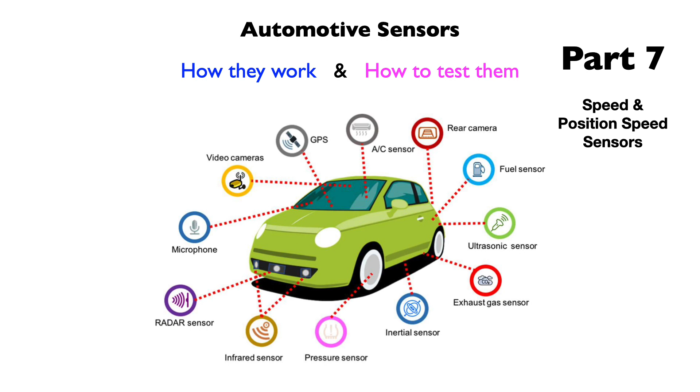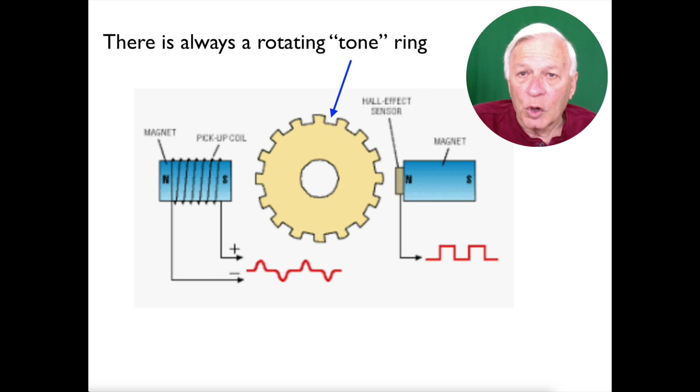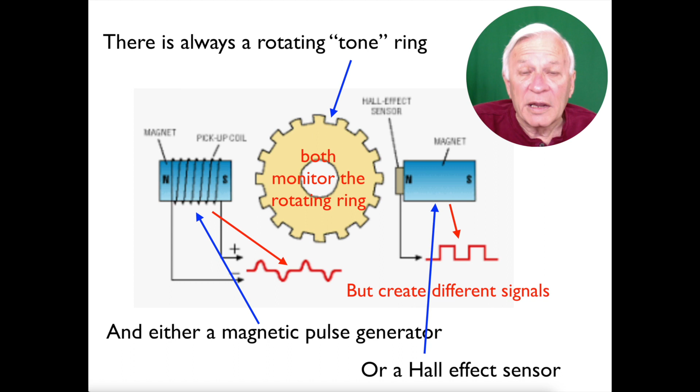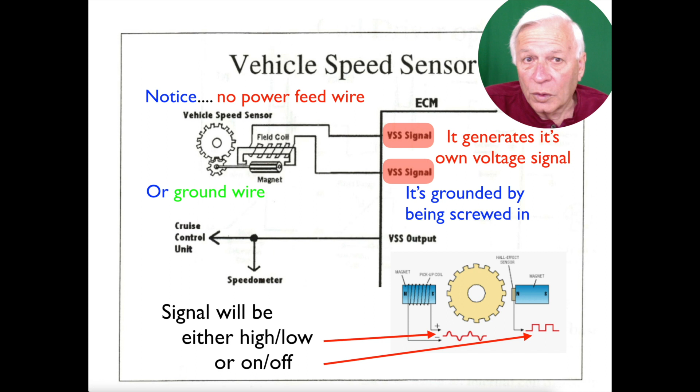Here's the diagram. Notice there is no power feed wire, that's because it generates its own voltage signal. And there is no ground wire, the ground comes from being screwed into the body. The signal will be either high or low, or on or off, depending upon the type of sensor. The PCM then converts this signal and sends it to the speedometer and or the cruise control, depending upon the circumstances.

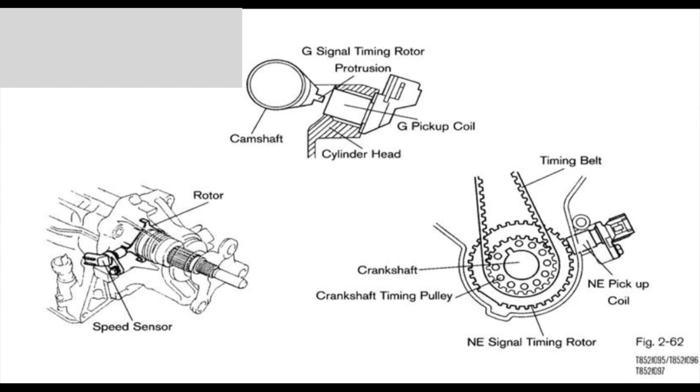Now, position speed sensors are very similar to speed sensors in that they report speed, but they can also be used to report a position, such as a cam position sensor. It reports the cam's position as well as the cam's speed.

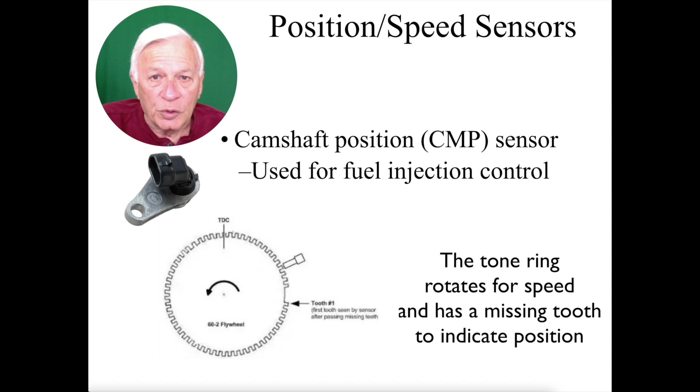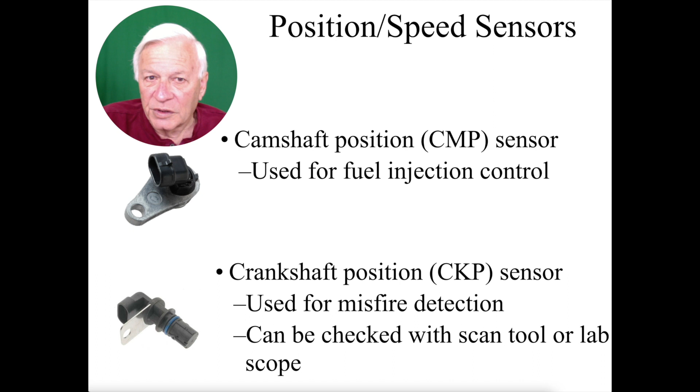The tone ring rotates for speed, and the tone ring has a missing tooth, and that missing tooth indicates the position of the valves. The crankshaft position sensor does the same thing, except that it references the crankshaft position and pistons, and that way it can be used to identify which cylinder is misfiring.